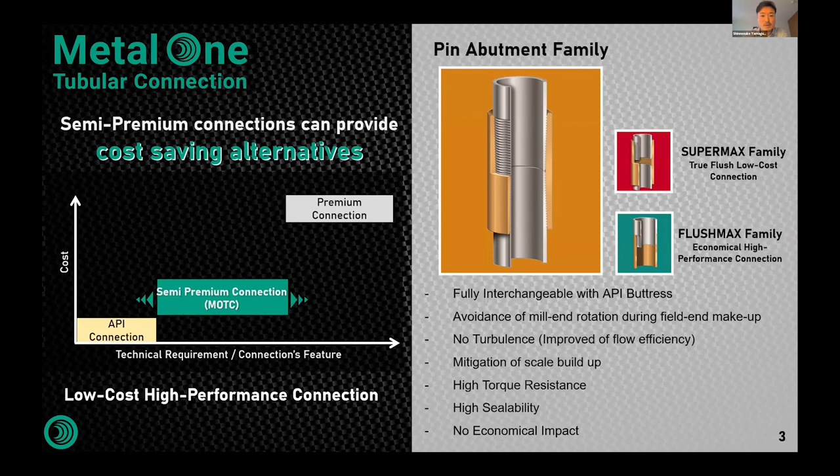Yes, this is GEOCONN. This design was born to meet customers' requirements for geothermal business, specifically for geothermal business. Of course, it's also used in oil and gas, but it's originally intended to meet requirements for geothermal business.

This shows a little bit of detail about the size: 4.5 to 20 inches, and as I explained, it's interchangeable with API buttress casing. We have more than 50 million feet delivered all over the world, and a high torque shoulder version is available.

The bottom, MO-4TP, is under development, it's almost completed. It's not GEOCONN, so it's a little bit confusing, but it's a different type within the pin abutment families. So it's part of the lineup of the pin abutment family, but it's not GEOCONN.

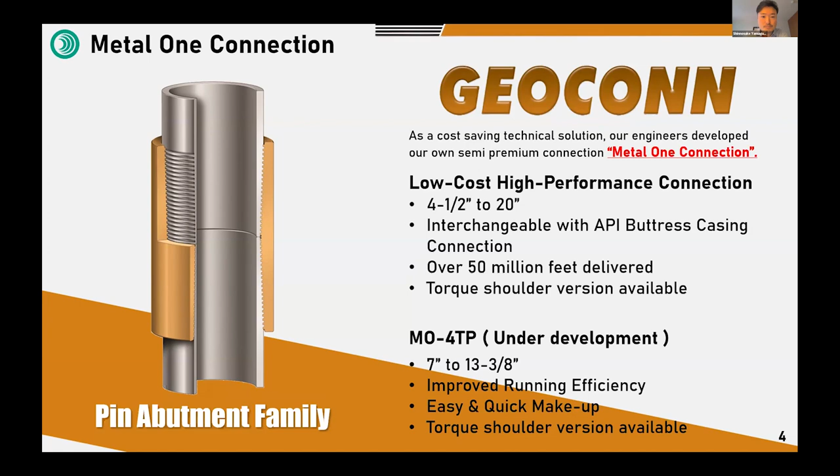Also, as you are interested in, it's spreading to European regions, and we have a lot of experience in that kind of region. So we are now trying to expand this business because we believe this will fit some of your customers, and we can provide some solutions to the customers.

So if you are interested in our geothermal connections, we are welcome to have a more detailed discussion on the technical and more commercial side. Thank you very much for your listening.

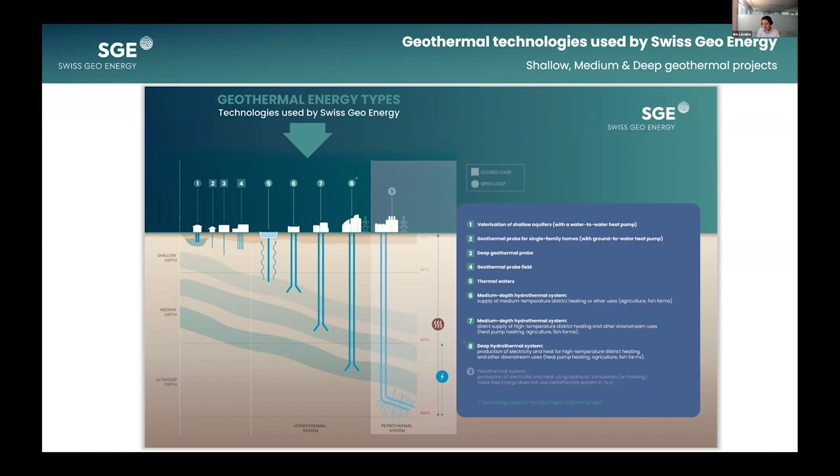The Molasse Basin has a number of aquifers that have been explored. One thing that's different from some other European countries, worth noting, is that unlike France, unlike Germany, unlike some Eastern countries like Croatia or Hungary, Switzerland has never been an oil and gas country. This creates some subsurface risks, meaning there is less data available for developers like us, but it also creates opportunities.

And we all know, I guess EGEC members know, that Switzerland is number one, certainly in Europe, when it comes to heat pumps, so shallow geothermal systems, and this is great. But it's quite far behind in terms of development of deep geothermal systems, and I believe one of the reasons is that there's less data available—there's a bit more subsurface uncertainty.

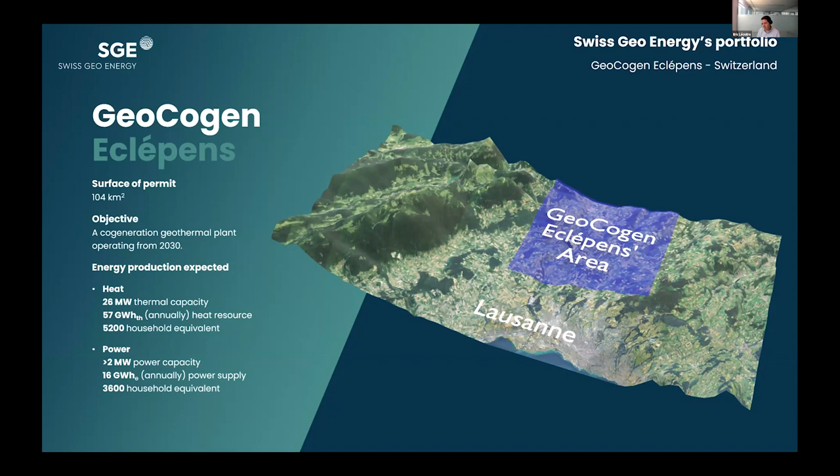The second one is called La Broye, an area a bit further east of the first one. Massive area. Similar to Eclépens, what is key in our mind is that we try to fit relatively certain resource with existing needs. Similar to Eclépens, where we have an existing district heat network, we call it CAD, this area has got many different end users with existing heat networks that need to be decarbonized. So there's a perfect fit between very likely heat resource and existing users at surface. It's the perfect recipe for a successful project.

We will be embarking on a massive 3D acquisition, more than 400 square kilometers. What makes it quite specific is that it's split between different cantons. Something you're probably not aware of is that, unlike other countries, the subsurface is owned and managed by the different cantons in Switzerland. There are 26 of them, if I'm not mistaken. So in that particular area, we have to manage the subsurface regulation of three different cantons. But this is going well, and we hope to be executing this 3D seismic acquisition at the end of next year.

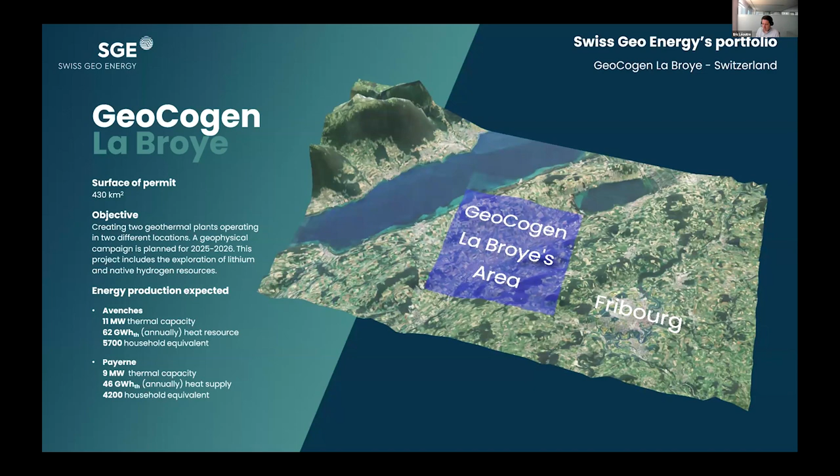So very exciting projects. I'll end with this slide to tell you that myself and my colleagues, Benjamin, who is the CEO of the company, and Pascal, who is the CTO, bring a wealth of expertise in terms of geoscience, engineering, project management, and industry. This is the DNA of the company. We hope to accelerate the transition, especially in Switzerland, but beyond. We're looking at projects at the moment in Croatia and Hungary. Our objective is to develop the portfolio for obvious risk mitigation reasons and for scale-up synergies. We are very happy to welcome partners on our projects, and to also be active partners in other projects. And with that, I'll finish my talk and take any questions you have.

Thank you, Eric. Yes, quite interesting to see the development you're doing in Switzerland. Do we have some questions for Eric? Because I have some for you.

So you explained that you have done a 3D seismic campaign. First question: you do in-house treatment of the data acquired. I know you are quite an innovative company, so are you envisaging using some artificial intelligence tools to help with data treatment? That's the first question. Second question: you say you'll do some exploration drilling in the future. I think we haven't seen that in Europe for 15 years—I think the last one was 2010 or 2011, a slim hole in Turkey. Are you envisaging some slim hole drilling in Switzerland, or is it a no-go option because it's too costly for no production?

First, to show you where we are worldwide. As I said, we have a head office in Stavanger, Norway, and a regional office in the Middle East, in Abu Dhabi. We work onshore and offshore in most regions, from China to Canada. And the jobs done worldwide have, without fail, been very successful operationally and technically.

We've achieved up to 10 times the production performance from wells compared to the field averages the operators were working with. Just to give one example: the last well in the Middle East, in Abu Dhabi, an offshore field in a fractured carbonate reservoir, was doing on average 300 barrels a day. Best well in the field, 600 barrels a day. We did reservoir stimulation, and the well has now been chugging along for 9 months at 3,700 barrels a day, just to give an impression of how well the stimulation can deliver.

We have 49 staff of 17 nationalities, and like I said, we're working worldwide and growing our business.

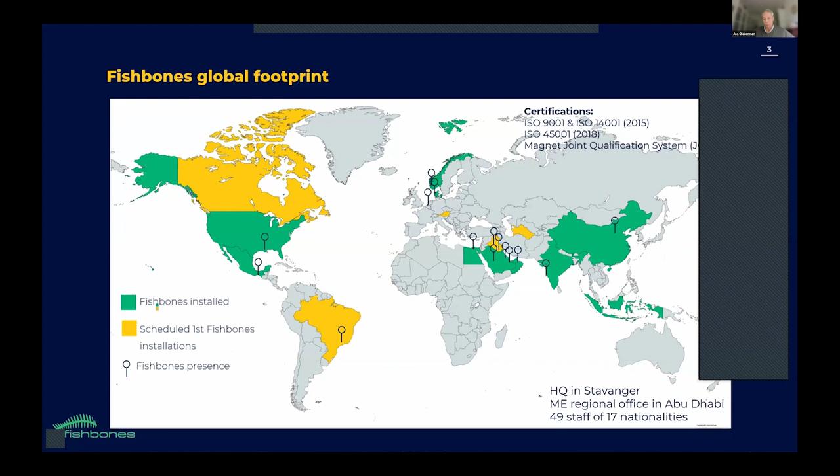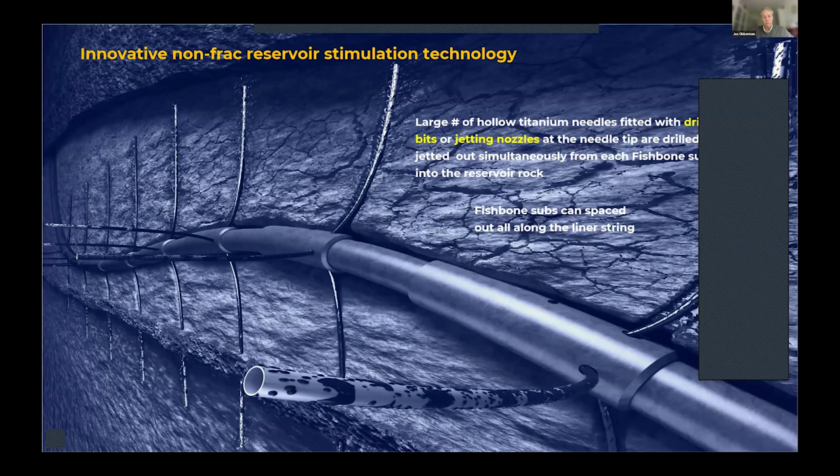What does the system involve? The system is run as an open hole liner, just like a slotted or pre-perforated liner. In the liner string we space out what we call fishbone subs, and from those subs, hollow titanium needles, fitted either with a drill bit at the tip or a rotating jetting nozzle, are drilled or jetted out simultaneously from all the subs in one pumping operation into the reservoir rock. The fishbone subs can be spaced out all along the liner string, and we can fit a maximum of 80 subs on the string, depending on the length of the open hole, allowing a very large number of laterals to be created in a short time.

We have two systems.

On the left here is the Fishbones jetting system, where the needles are fitted with a rotating jetting nozzle at the tip. The working fluid is an acid, typically hydrochloric acid at 15%, though strengths can differ. This is used for stimulating carbonate reservoirs, but can also be used for coalbed methane, and oil sands. That's not so relevant for geothermal development purposes though.

For carbonates, each lateral creates a 12-meter long lateral with 1 to 2 inch diameter. There are 4 needles per sub, going up, down, left, and right as you look down the well. We can fit 80 subs on the string, so you can create in one pumping job 320 laterals maximum of 12-meter length.

On the right is the Fishbones drilling system, where the needles are tipped with a bit. The bit differs depending on the rock type. We can do anything: sandstones, shales, basement rock, metamorphic, fractured metamorphics, granites, basalts. We've done everything already. The needles create half-inch diameter holes, with needle lengths of 10 to 18 meters.

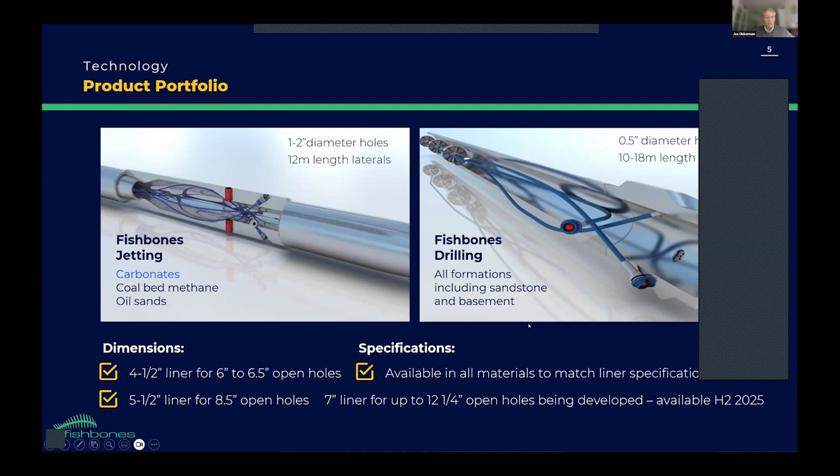Just to show you what the system would actually look like for one needle from a single sub, as you see here in our facility in Stavanger. The red line indicates the needle going through, in this case, large sandstone blocks strapped together on the facility floor, and the needle goes out in about 1 hour, drilling 10 meters through the sandstone blocks.

It's not stopped by anything—not gaps, fractures, or cemented layers. It will just go and drill through. As you can see, it goes out at an angle; the starting angle is about 37 degrees. It then curves away from the well and ends up perpendicular to the well at, in this case, a distance of 10 meters, giving you 8.5 meters perpendicular to the well.

The drilled system has 3 needles per sub, and they go out at 120-degree phasing.

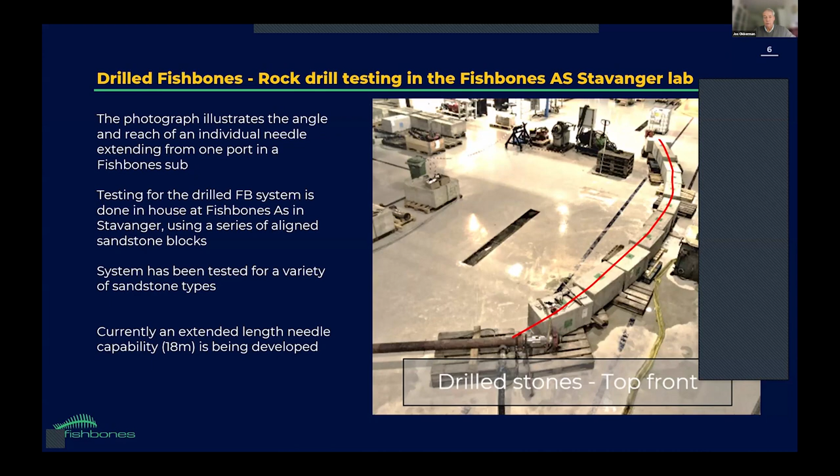So how simple is it to deploy this? Very simple. Basically, you drill your well to TD, draw back your drill string, and deploy the lower completion string—the liner fitted with Fishbone subs—in open hole to the terminal depth. You anchor the string in the reservoir interval by inflating backbone anchors. Then you start the pumping job with the rig pumps for the drilled system to activate the Fishbone system, or with acid, you use the acid pump.

The power fluid pumped is acid in the jetted system, and drilling mud or geothermal reservoir water or brine with the drill system. So with the drill system, you can just use what is already in the well to start the system—there's not even a change out needed. The job itself takes 4 to 6 hours to extend all the needles simultaneously into the reservoir. So it's a very quick job.

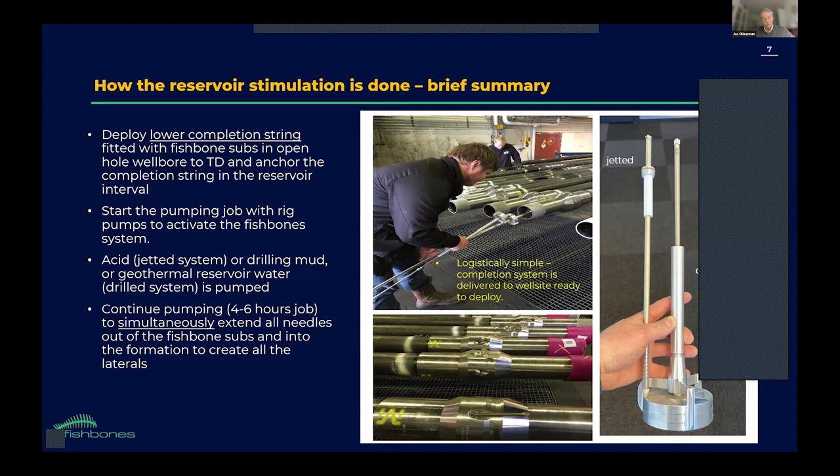We've done jobs offshore Norway for Equinor and Aker BP, very successful jobs, and that's about the time it takes even with very large systems. 61 subs is the maximum we've pumped at the moment. Next year we'll do a large job for Equinor in an offshore field featuring 80 subs with 18-meter needles—that's 240 drilled needles, 18 meters long. You do the math, that's a fantastic ROP if you can do that in 4 to 6 hours.

So what is the value of this technology? In many wells that are drilled and completed, the damage zone around the wellbore is quite considerable. My experience is that this damage zone gives a huge skin in many wells—it's a bit underestimated. Bypassing that damage zone with many laterals, punching through into the reservoir, gives a very big improvement in well performance.

This applies to both injection wells and production wells. It definitely increases reservoir exposure because you can place these subs and create laterals all along your wellbore, in vertical, deviated, or horizontal wells, wherever you want. So you become like a surgeon—you can operate on somebody's brain without operating on his stomach at the same time. It gives you back the control that is lacking with many other stimulation methods.

The system is especially good at connecting through layered reservoirs because it's a mechanical stimulation system. It can punch through all kinds of layering, lamination, and bedding. Many of the geothermal reservoirs in Europe—the Permian, Triassic, Jurassic, and Tertiary reservoirs you see all over Europe—are very layered.

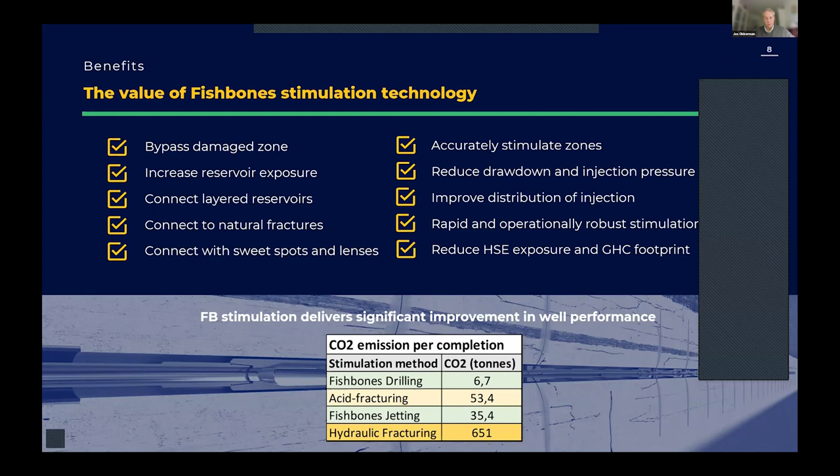Just to give you the table at the bottom: Fishbones drilling has about one-hundredth of the CO2 load that hydraulic fracking would have. Fishbones jetting is less than acid fracturing, and it delivers a much better distribution of the acid because the acid only goes through the needles at the positions where the subs are located by the operator's team in the reservoir. That is my presentation, and if people are interested, my details are in the first slide.

As I said, the performance improvement worldwide has been spectacular. The least we've seen is about 2 times the productivity on the wells and injectivity. The best is about 12 times the productivity, and that has been repeated in many different countries. The last job in China, in a metamorphic reservoir, did 3 times better than the operator's other wells in the entire field. Offshore Norway, the results for Aker BP and Equinor have been very good as well.

Aker BP, in the Edvard Grieg field—there are papers on that—saw results 10 times better than other wells in the field. These are all long horizontal wells that were perforated and cemented, and this stimulation method does better than that. In Europe, fracking is not the favored stimulation method. Sometimes you would like to do that, but you cannot because of regulation and seismicity risk, especially in Central and Western Europe—Switzerland, Germany, the Netherlands, Denmark, UK—where fracking is frowned upon, and many companies have seen their projects stalled or stopped by authorities because of seismicity risk.

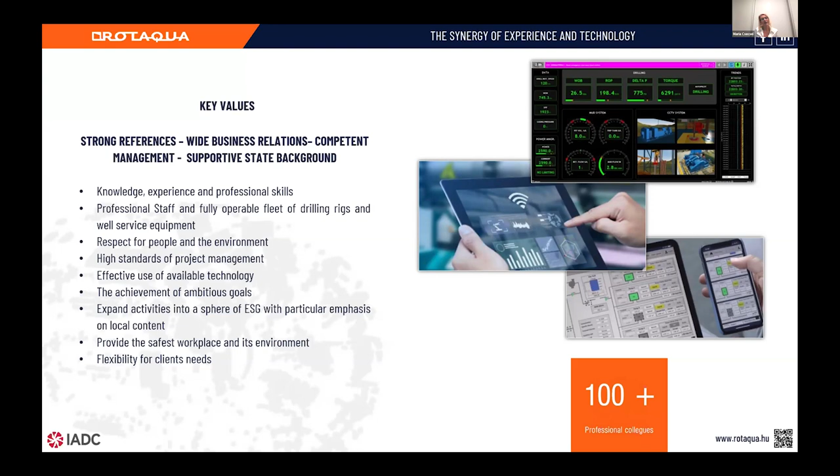We are in relation with the University of Miskolc, so we can provide well-qualified young engineers also. Our main value is human resources. Please, next slide.

ESG strategy is an inherent part of our mission and the way to actively shape the world around us. Rotaqua understands the need to respond to the pressing challenges of present time. Being on the road to a more socially stable and environmentally safer future, we have linked the ESG strategy to the core of our business and corporate strategy.

We want to build our business on the three core pillars of ESG, for which we have defined particular and measurable targets in 8 topics.

The ESG strategy reflects Rotaqua's intention to reflect a positive approach to this topic from environmental, social, and responsible corporate governance areas in our business activities. The strategy proves our aim to leave a positive footprint and make the world better and safer during our activities.

We operate an integrated management system, and our management takes QHSE as a top priority. By using these systems, we minimize the number of accidents at work and significantly reduce material damage resulting from accidents. Our target is 0 LTI.

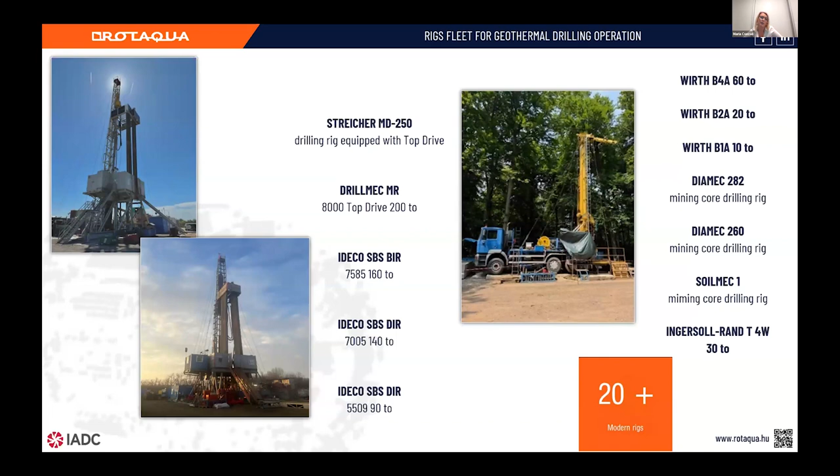In this case, Rotaqua will be the only company on the domestic market with the necessary competencies and equipment to fulfill our mission. We can see it on the next slide.

Deliver high quality drilling and geothermal services in the domestic and international market. We can be the leader in sustainable energy solutions, harnessing the Earth's geothermal potential to power a greener, cleaner, and more prosperous future. In compliance with the Hungarian National Energy Strategy, Rotaqua's strategy also defines the market leader position in drilling of geothermal wells.

Although we are already a key player in the geothermal market, we are ready to grow, to be the strongest on the Hungarian and Central Eastern European market, open for new challenges, new tasks, and meeting our customers' expectations. If you need the energy, we can provide it. Drilling is our passion. Thank you for your attention.

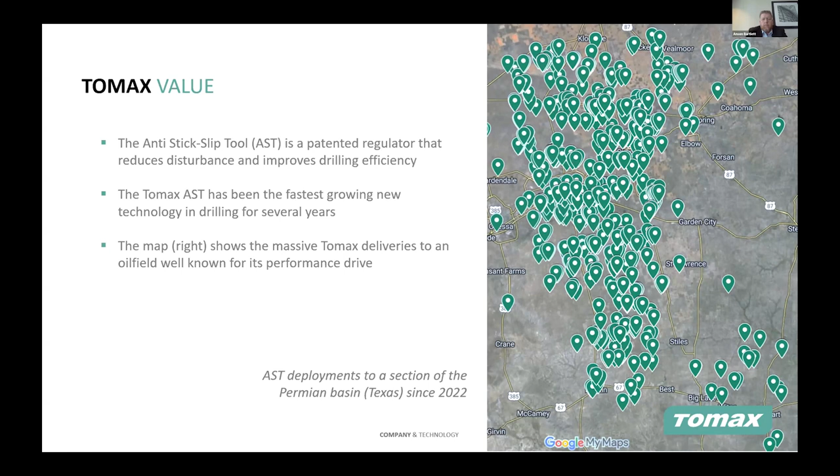So what is the Tomax AST? It's a drilling regulator. In its simplest form, it changes the depth of cut on a PDC cutter on the bit, by mechanically changing the way the bit interacts with the formation. The tool works very quickly, activating 5 times a second, with a 20 millisecond activation, self-regulating the drilling efficiency on bottom.

How does that help? Well, you don't lose energy to vibration. The tool stores the energy it's absorbing and gives it back to the drilling process. If you're familiar with drilling, severe stick slip can slow your ROP, introduce failures into downhole tools, affect wellbore stability, etc. So what our tool does is primarily reduce or stop torsional vibration, but you also get a knock-on effect: less lateral vibration, less bit bounce, less HFTO. The tool is recognized both from hundreds of thousands of runs we've had, plus PhD students are studying it and writing papers, so it's proven in the field and academically.

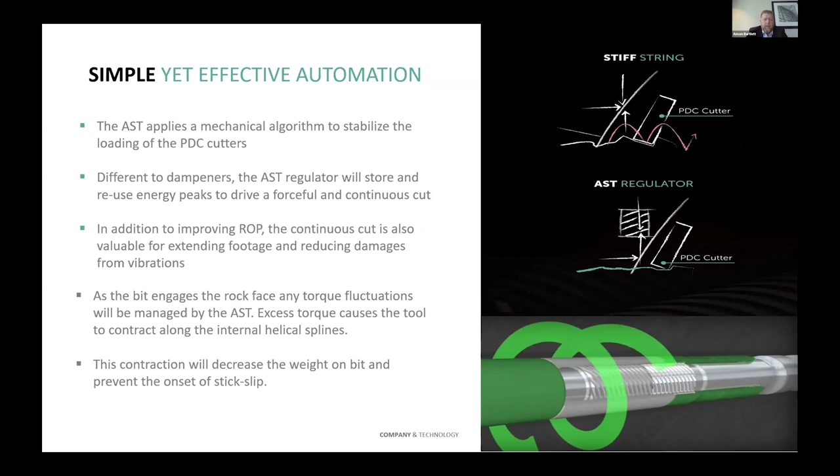Next slide, please. So just a little bit of flavor on Europe and some of the experiences we've got. Sorry, just one back, please. I know it was slow to change. We've drilled a number of oil and gas wells within continental Europe, and we've got a bunch of case studies I can share for sure. Ultimately, we supply faster ROP, drill further by reducing bit wear, and ultimately drive down drilling cost.

Geothermal is obviously very dependent and project-dependent on the actual cost to drill your wells. If you want to reduce that cost, a drilling regulator should definitely be part of the makeup. Just recently, we've partnered with Eavor in Munich for the loop system they're drilling, and on the 4th or 5th run, we did 2,000 meters in one run. They're pretty happy with that last one. We'd like to partner more in the geothermal space and take our expertise and knowledge from oil and gas into geothermal drilling. Basically, a well's a well as far as we're concerned. If you want to reduce cost, you should certainly consider using one of our tools.